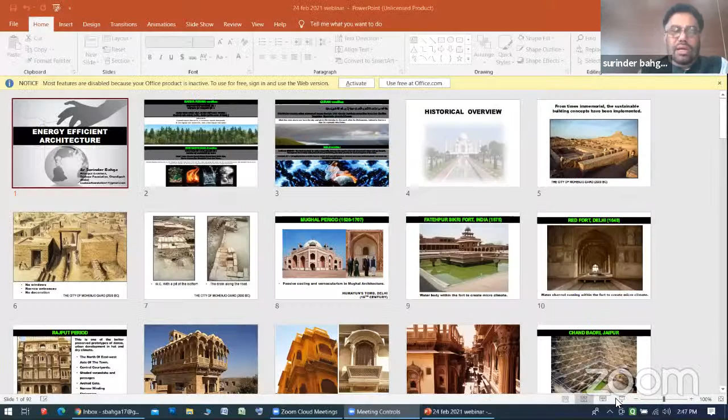Sir, in the meanwhile, you can tell us about the webinars that you've been hosting to promote energy efficiency in Punjab. Punjab Energy Development Agency is organizing a 7 days program, which is a week-long program to create awareness in all the departments of the state. And apart from that, there is a separate program going on with the architecture engineering colleges. And likewise, some debate in the state of Punjab for the school children. The aim is to create awareness about energy conservation.

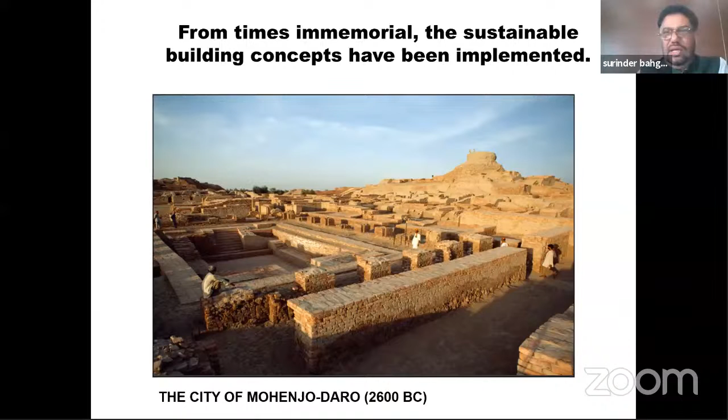So let's have a historic overview. In ancient India, the Mohenjo-daro township was built in 2600 BC, with care taken to design it keeping in view the geography and local climatic conditions, using local materials. There were no windows, they had brick jalis, and there was no decoration. The houses were very modern, using local bricks. That township had a proper designed sewerage system even in those times.

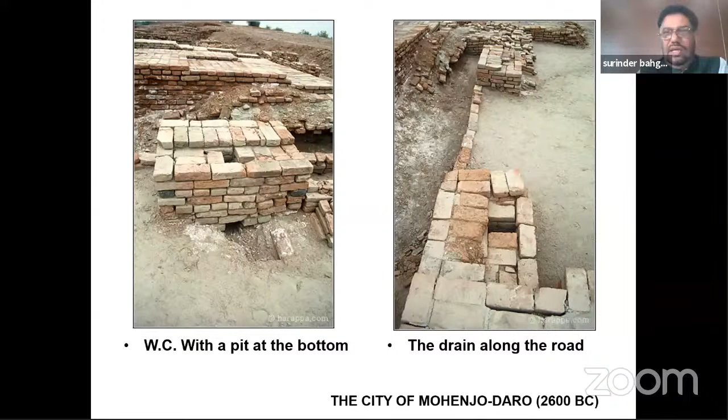In nearly 200 years of the Mughal era, India's architecture was almost at the peak of its perfection. All the buildings used local materials. There were projections in the Fatehpur Sikri fort built by Akbar. You can see the uses of water, stone, and jali.

This is the picture of Red Fort. There was no electricity at that time, yet there are water channels inside the verandas.

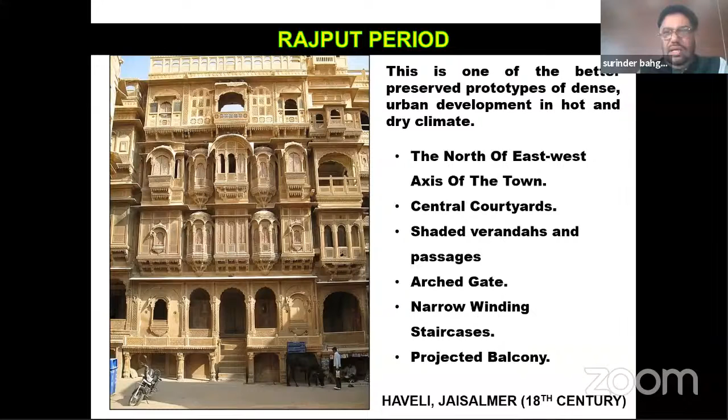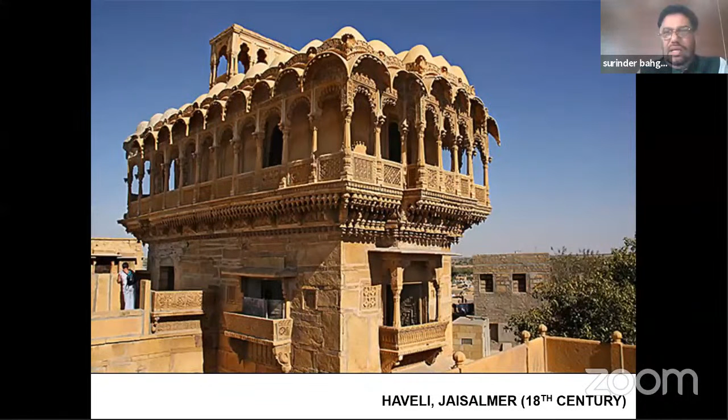In the desert of Rajasthan, in Jaisalmer, these havelis were created with local stone, and windows are protected from the dusty wind and hot climate. They introduced courtyards and used this kind of architecture to protect the interiors from harsh climate. You see how windows are protected, and the streets were very narrow so that they stayed shaded by the buildings themselves. These streets were there at Jaisalmer.

India has very advanced systems of water harvesting. This is a Chand Baori in Jaipur, and there are many others in other parts of India, where water conservation techniques were introduced.

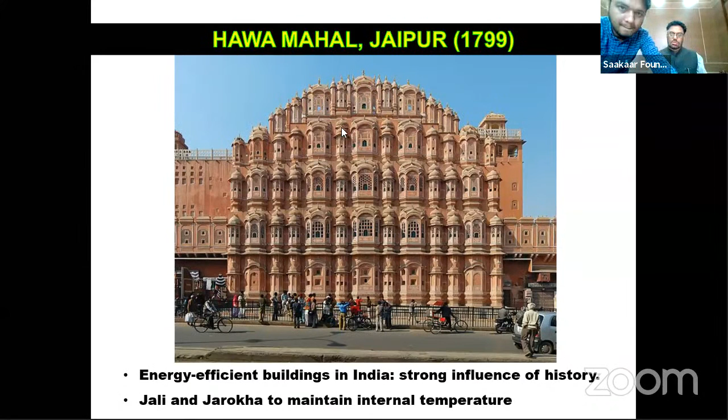Architect Bahga, can you hear me? I think his video, there has been some technical issue with his system. So yeah, he's back here online. Mr. Bahga, yes, can you hear me? me? Second. Yes, ma'am. Yes, please. Yes. Hello. Am I audible? Yes, sir, you are audible. Okay. So these kind of buildings were made in India way back. Neeraj? One second, please.

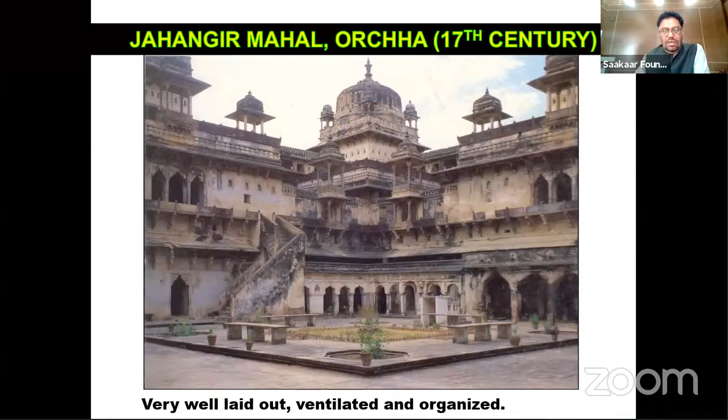In Orchha, Jahangir Mahal was made in the 17th century. You can see the courtyard planning, thick walls, and the shaded walls and openings. This was the kind of architecture India was needing.

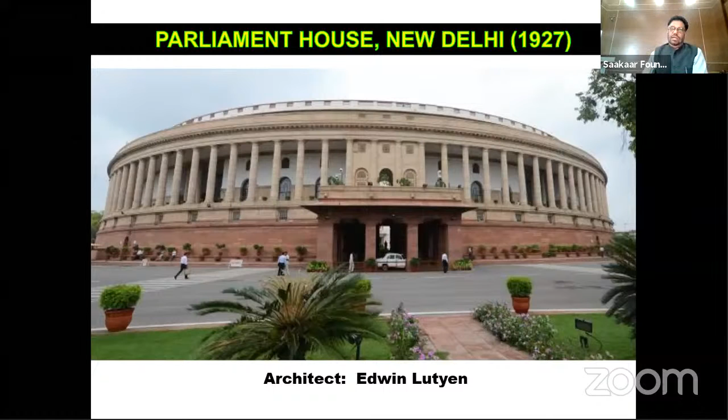During the British Raj, all the buildings built in Delhi were designed according to the local climate. Local materials were used, small windows were there, thick walls were there. You can see the Parliament House, and even in the Secretariat in New Delhi, projections and small openings are there. These projects were designed by British architects, but yet they still took care of the local climatic conditions.

This is the main point: when Corbusier came to India, Pandit Nehru invited him. On reaching Chandigarh, the first thing he did was study the climate of Chandigarh. Even the emblem of Chandigarh, the open hand, is designed to give the sense of wind direction to the local people.

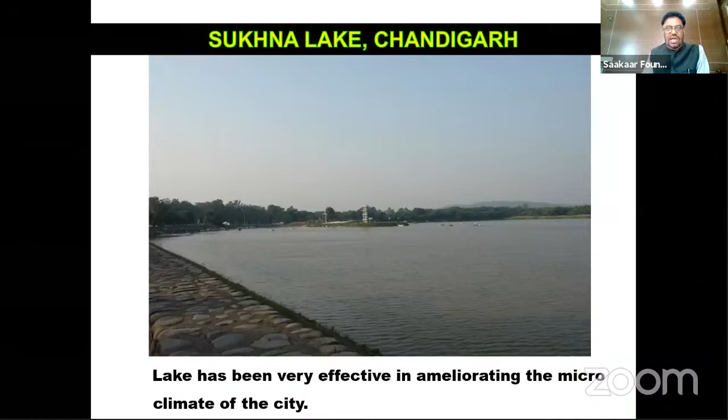Chandigarh has an artificial Sukhna Lake, which has considerably improved the microclimate of the city. That was designed by Corbusier with the same intent. Chandigarh is the only city where we have 35% green spaces, compared to cities like Kolkata where we have only 2% green areas.

In the High Court building, we have a double roof, and you can see how the glazing and windows are protected with a combination of horizontal and vertical louvers. In the Capitol Complex, this is the Assembly Hall with Vidhan Sabha. Corbusier introduced shallow water bodies so that users can get cool breezes.

In the Secretariat, care has been taken to orient the building in the wind direction, and the verandas and glazings are very deep, about 12 feet, so that they don't get heated up with the sun rays.

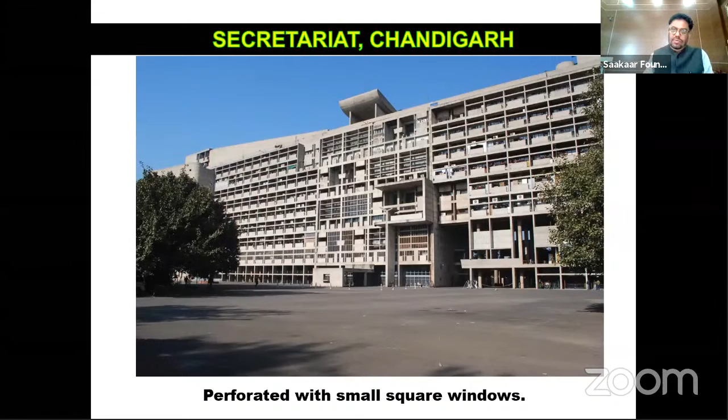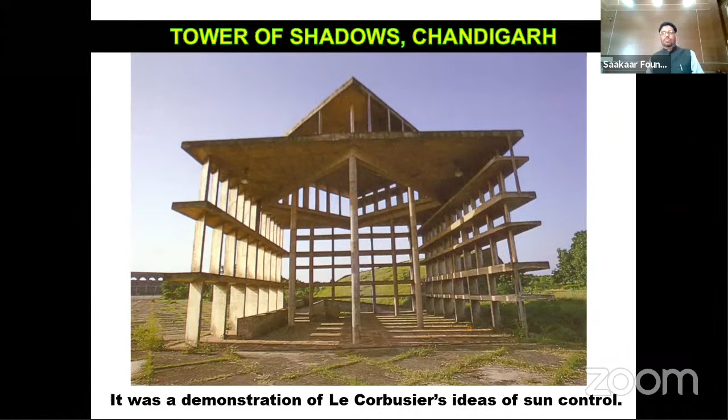This is the Tower of Shadows in the Capitol Complex, designed and implemented by Corbusier with the aim to educate architects and engineers about how to design louvers around buildings.

In the middle of the 90s, famous Indian architect Charles Correa built the LIC building in Delhi. In this building, for probably the first time, there was a huge glazing on the northern side. There was a lot of hue and cry that this architect had gone mad, designing buildings with a lot of glass in a hot and humid climate. But to my mind, that was very sensible, because we can always put glass on the northern side—it never gets heated up.

After that, this is our PEDA Bhavan, a very nicely designed building. But when the building was nearing completion, a senior bureaucrat of the Punjab government forced the architects to change the design at the last minute and put glazing all around, saying he wanted a Gurgaon-like building in Mohali. That was the major blunder he made, and the result is that this building never gets cooled, despite having tons of air conditioning load on it.

And the building works like a furnace. Buildings consume nearly 48% of the world's total energy - that's what surveys indicate. So when we design buildings, we have to have a very sensible approach.

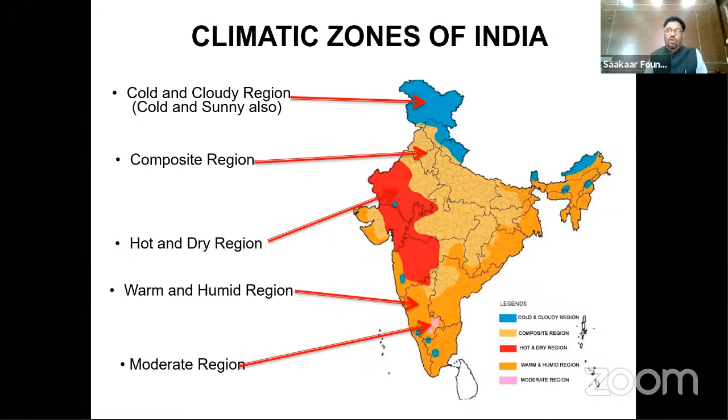Now I will briefly explain the design strategies for a composite region. We have to resist heat gain in summer and resist heat loss in winter, and we have to promote heat loss in summer and in monsoons.

Following these guidelines, we designed the Red Cross Bhavan in Sector 16, Chandigarh, facing the famous Rose Garden. The building is oriented to face north and south. The project got delayed by nearly a year because we argued with the Chandigarh administration that we should have a proper orientation, since the zoning plan was wrongly made nearly 50 years back. So we got the revised zoning plan sanctioned from the government with the help of the then chief architect, and ultimately the building was designed after a long struggle to achieve the right orientation.

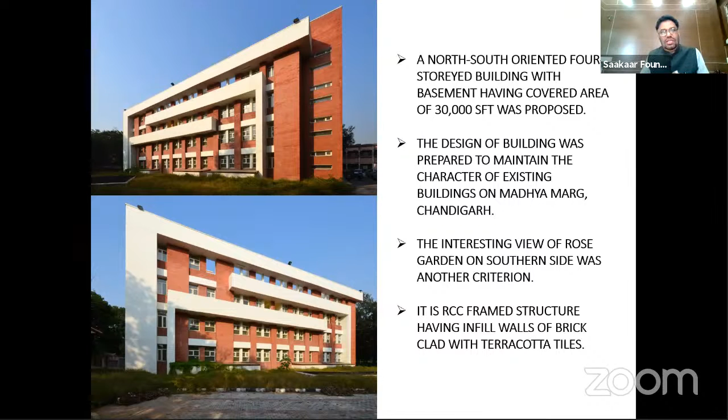In this project, you can see there are small windows, properly protected both horizontally and vertically.

Currently we are involved in designing a big university, the CT University on Firozpur Road near Ludhiana, Jagraon. This is a 50-acre project where all the buildings are oriented to face the north and southern direction. The major facade faces the northern or southern side, considered the best orientation for any academic building. We faced a lot of arguments with the client and owners to convince them to place the buildings this way. Very few people know that most buildings in the Punjab University campus are oriented in a similar way.

We participated in a competition for the HAREDA office building long back. In this project, we introduced shafts tapered at a particular angle, so there's no need for mechanical ventilation in the building. These shafts are scientifically designed so that hot air sucked from inside can rise and escape through the top openings.

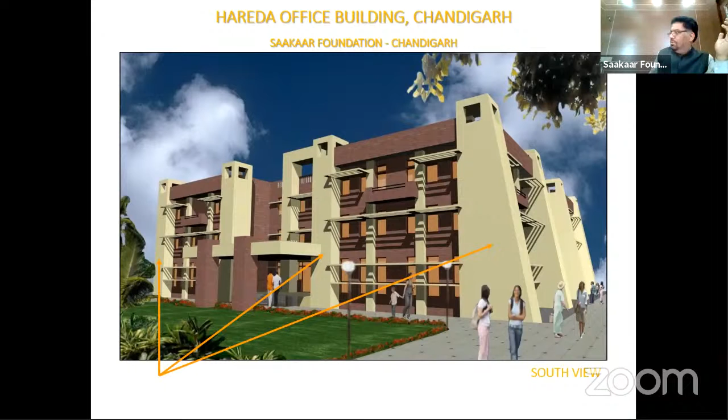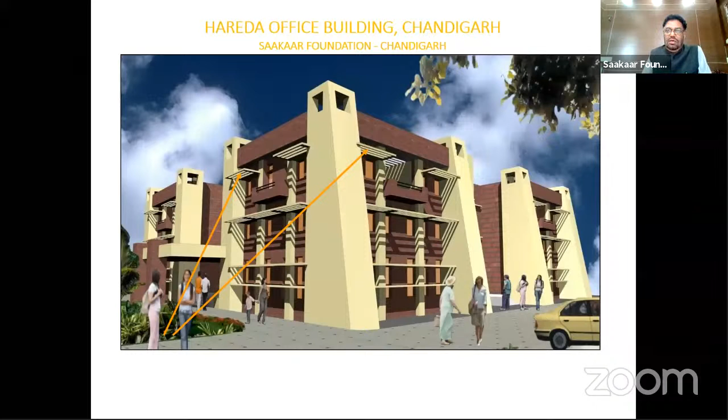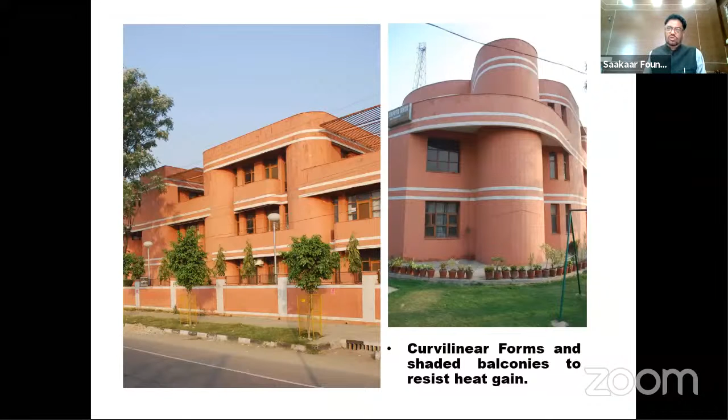Next is the Bal Bhavan, which we designed in Mohali. Here on the western side - which gets very heated up in our climate - we put all the toilet blocks on the front, which people normally don't advise. We decided that if the toilet blocks get heated up, at least the heat won't transmit to the dormitories where children stay. You can see how we shielded the windows with balconies and projections, and the building also has open-to-sky terraces where children can enjoy the weather.

Then we designed this primary school wing of the Yadvindra Public School. This was a design competition which we won. Captain Amrinder Singh, the current Chief Minister's mother, Maharani Mohinder Kaur Ji, was the chairman of the trust, and she directed that no tree should be cut from her school - she would give the project to the architect who would not cut any tree. Many architects submitted design proposals, and she chose our design with the help of experts and other jury members.

As a result, when we designed this building, we did not cut any tree, and we have shielded the windows properly.

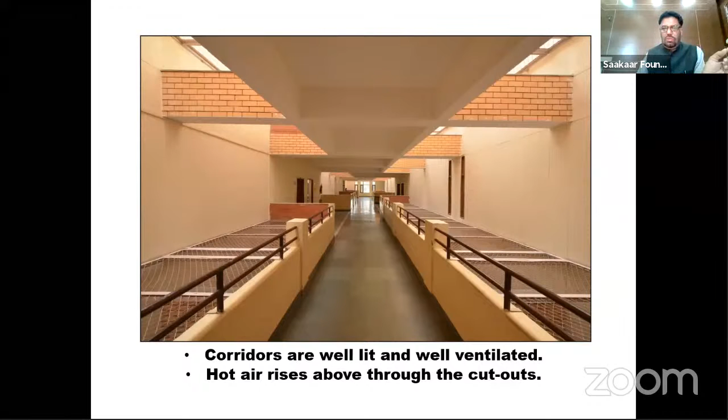This is the corridor of the primary school, and there are cutouts on either side. These cutouts facilitate internal air movement and bring in a lot of light, so the interior becomes very nice, and the noise in the corridor is not allowed to enter the classrooms. Classrooms get a better quality of education because there's no noise at all due to these cutouts.

We also designed a youth hostel at Patiala long back. Here too the windows, doors, and glazing are shielded properly. These balconies are segregated from each other to ensure privacy to all the residents.

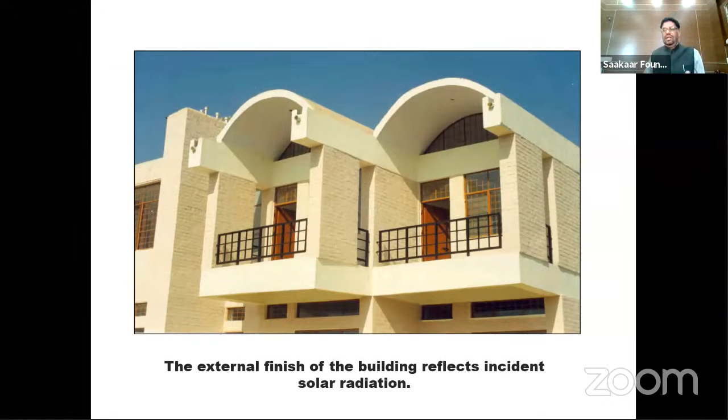And to drain the rainwater, we have provided rainwater spouts.

We also designed a Christian school, Baptist school, in Chandigarh. Again you can see the windows are properly protected with a combination of horizontal and vertical louvers. You can see this model — we have planned courtyards, two smaller and two bigger, in the plan. This is a very traditional kind of planning, but we opted for this because it works better in Indian climate.

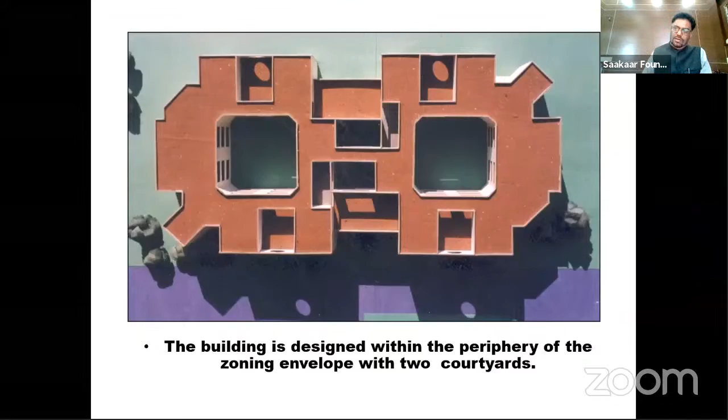Then we designed about 1,200 rooms for the postgraduate students of NIT Kurukshetra. Here we designed an individual small room for each postgraduate student with an attached balcony, and all the rooms have independent balconies and glazing which is properly protected. There are also courtyards and other features to keep the building cooler.

We then designed this convention center in New Delhi for the Ministry of Agriculture, and we won first prize for this 40 crore project.

We also won a prize from HUDCO for designing energy efficient housing in Jalandhar. In this project, as you can see in this sketch, we have provided earth berms at the bottom.

We have provided planters in front of the windows, and perforations in the parapets. There's a staircase tower in the middle which has openings at the top, and those openings help suck hot air from the surrounding rooms, which can escape through this stairwell. Ultimately, the building remains cooler.

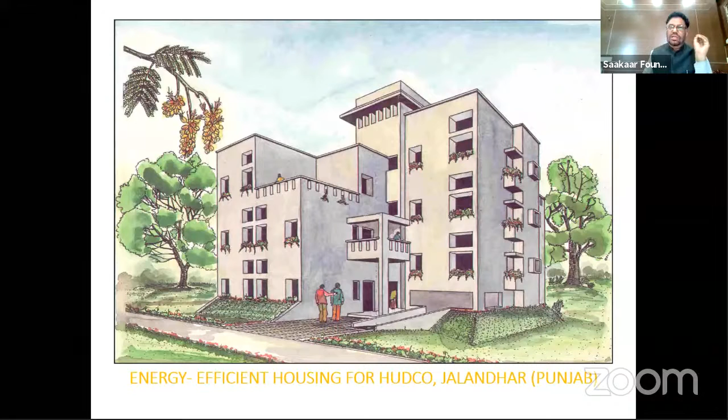We also designed a very small library in a small village in the Moga district, called Lopon. This is called a green library in the village. There's a cooling tower on top which cools the air, and the cooled air is thrown down into the interiors of the library, so the library gets cooled air.

The building has north and south orientation, and on the eastern and western sides we have cavity walls because we get a lot of heat from those sides.

Even the book racks are placed along the external walls, with windows kept above them. In this picture, the windows are above the height of the book racks, and these small windows are deeply recessed so that no rain or sun rays can fall on them. As a result, this building remains very cool, and the whole village uses it, along with neighboring villages.

The next climate category is hot and dry, primarily Rajasthan. Here the design mantra is different: we have to resist heat gain and promote heat loss at night.

We designed a township for the Indian military — a married accommodation project with more than 800 houses. It was very difficult to convince the army authorities to design this whole township to suit the local climatic conditions.

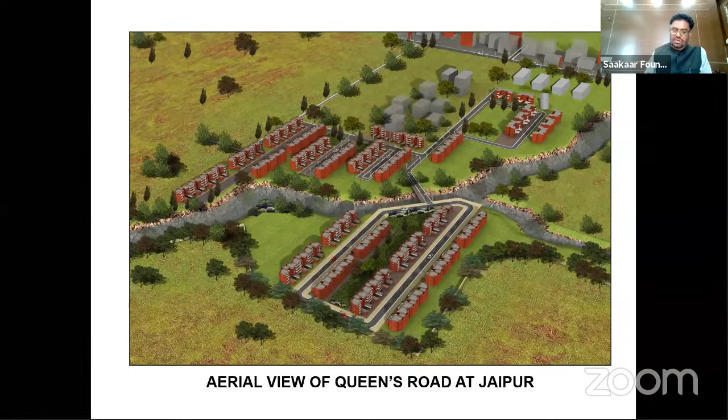We opted to orient all the blocks facing north and south, because in a hot and dry atmosphere only this kind of orientation works. Ultimately we could convince the authorities to have this orientation, though they had wanted just the opposite.

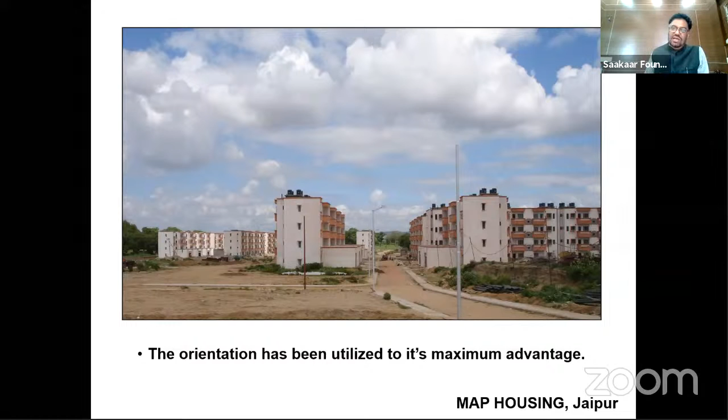This is the township, the housing we made for military officers and jawans. We used light color to reflect the sun's rays, and all the balconies and windows are shaded with a self-shading facade design. We also opted not to cut any tree on the site, and the planning of the whole township was done in such a manner.

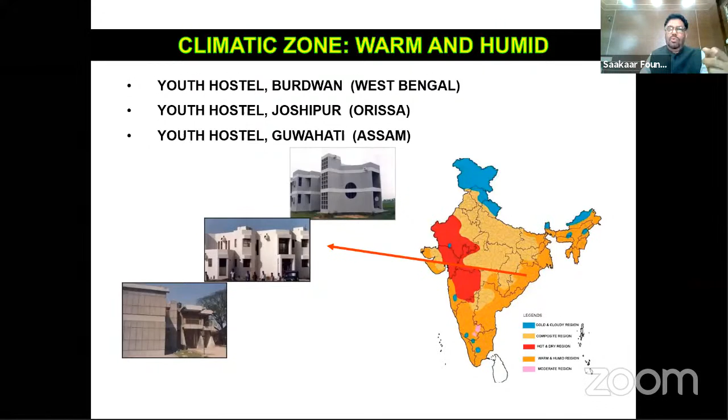Warm and humid climate is the coastal belt of India, where the design strategy is to promote ventilation.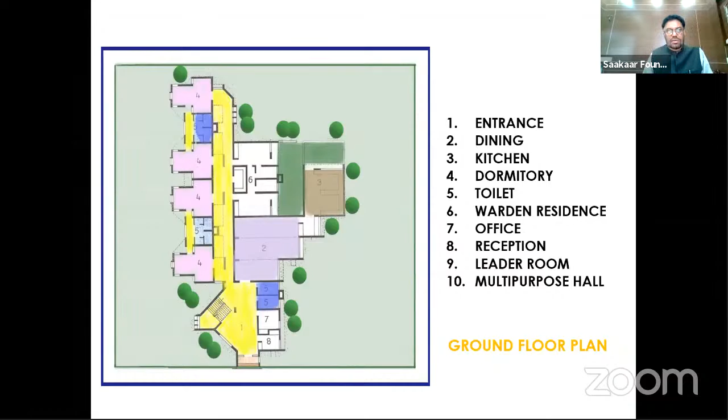When there's no electricity, the climate is very humid. We just open all 6 windows, and this becomes livable. At least the students or youngsters who stay there can live there. So this is the kind of building we conceptualized for West Bengal.

Because of a lot of rainfall and humid conditions, even the color scheme of the building was chosen so that it doesn't get blackened easily. To drain the rainwater from the roof terraces, rainwater spouts were introduced. And look at the window boxes, how we protected the windows from the rain and the sun.

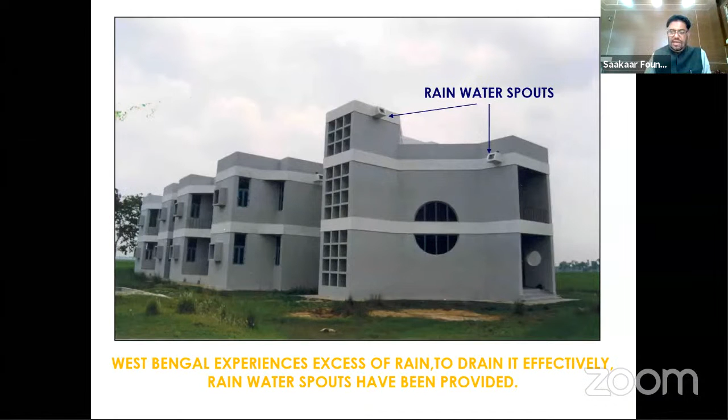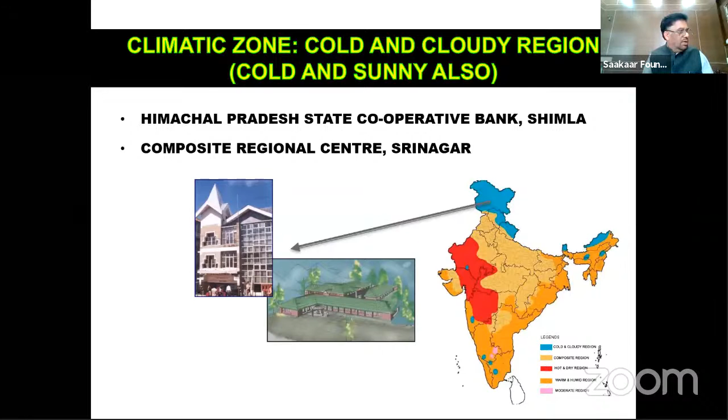The next category is a cold and cloudy region, which is Kashmir. We happen to design one project meant for people who got injured or incapacitated during insurgency. When we design buildings in such a climate, we have to take care to resist heat loss and promote heat gain.

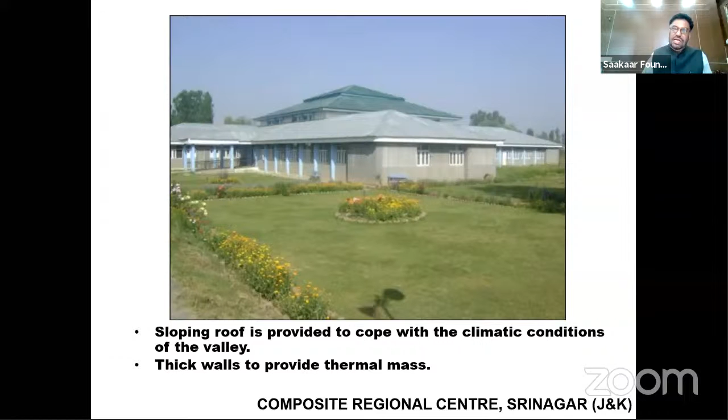Designing buildings in a cold climate is altogether a different game plan than designing buildings in Rajasthan. This is the project we designed in Kashmir. Here, snowfall is a serious problem. Snow, when it falls on the roof, gets accumulated, and it is very difficult to clean mechanically or physically. So we tapered the roof at a particular angle, and the snow automatically falls on the ground, saving the hassle of snow clearance from the roof.

The plan shape is swastika shaped, which is a sacred Hindu symbol. In the last part, I would like to show you a small video on how waste materials can be utilized for making houses. This is an example taken from Nigeria.

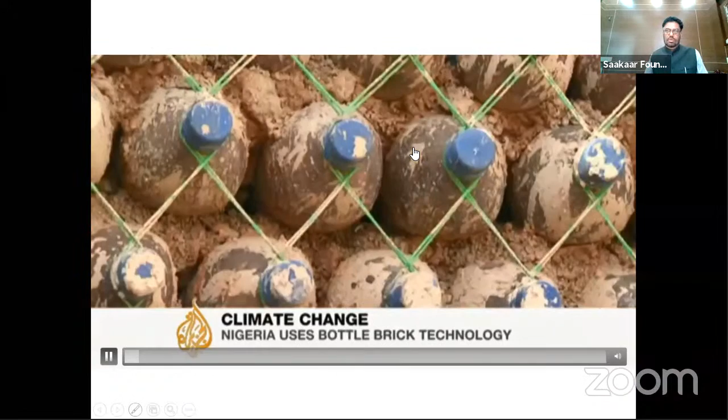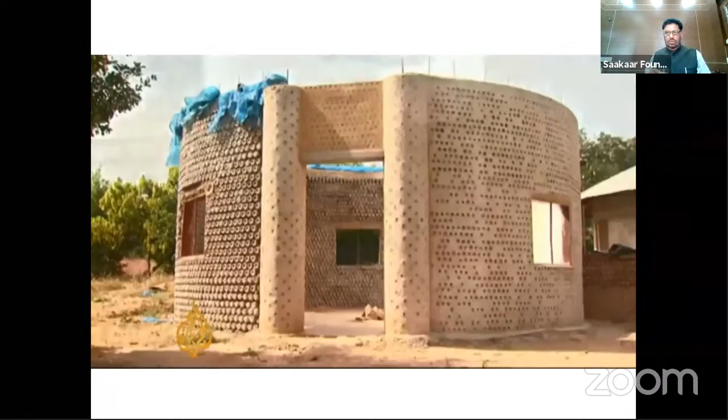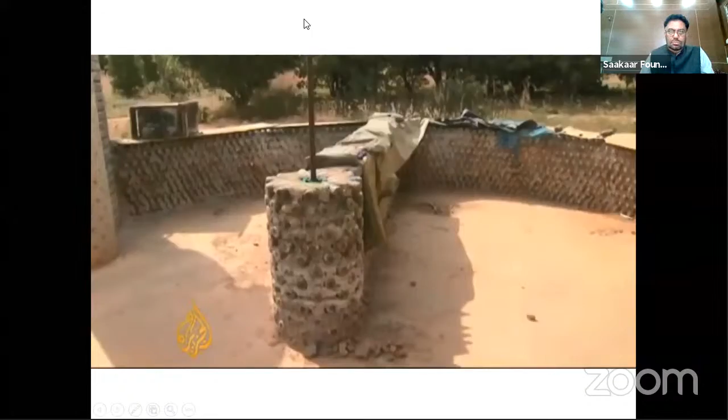They have lived in houses made of mud for centuries, but the cost of traditional house building is getting higher by the day. A house made of plastic bottles costs $15,000, one third of the usual price, making it more attractive. As there's no shortage of raw material, which is basically free, there's no reason why anyone should resist. The developers are looking for government support to expand the idea, hoping that cleaning up the streets and creating a much-needed greener economy will be a good impetus for government involvement. Reporting from Kaduna State, Nigeria.

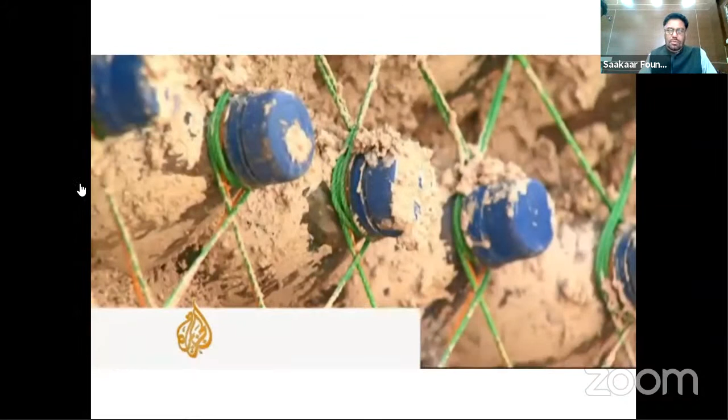It's an ingenious way of... Sir, we cannot hear you. Hello, now you are audible. Sir, again your audio is not audible.

This video was showcasing how waste Coca-Cola bottles can be utilized to make houses for poor people, and Nigeria is already doing it. The bottle is filled up with sand, and the bottles are piled up one above the other, tied with a nylon rope.

The conclusion of my whole talk is that India is a big country, a huge country, and there is a need to design buildings keeping in view the local topography and local climatic conditions. We architects and engineers have to see which zone we are falling in, and accordingly design the buildings. Thank you so much.

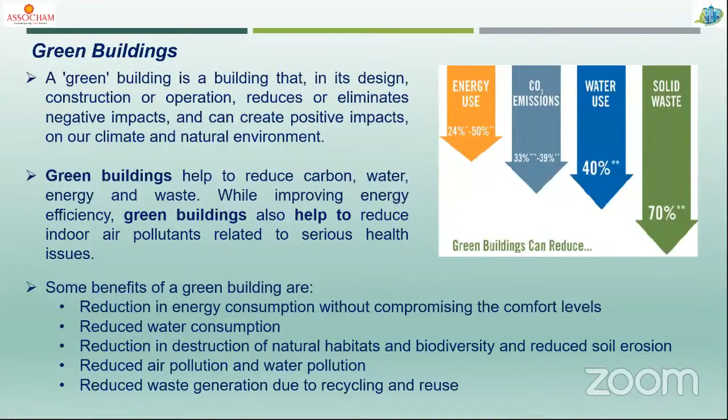So friends, these are some basic concepts. We have been hearing since the last 15-20 years that green buildings are very efficient buildings when properly designed. We can save around up to 50% of energy use, up to 39% of carbon dioxide emission, up to 40% of water use reduction, and up to 70% of solid waste reduction. So these are some benefits of green building design. There are many environmental benefits, economical benefits, and social benefits of designing green buildings.

So green buildings are inherently designed to make the best use of natural resources, and a green building is much more friendly to the environment than a normal building. We all know it has economical benefits also. So friends, there is a myth that designing or constructing a green building is a costly affair.

No, I can prove it on paper. I have done around 300 plus green building certification projects now, and I can prove that going for a green building certification is not a costly affair. In fact, from the very beginning, right from the first day, you will start saving your money. And I can prove it on papers, on energy models, daylight models, or any way you want it. Social benefits, we all know, friends, during COVID and post-COVID, now everybody understands the value of a home, a value of an office which has good daylight, good fresh air.

Even earlier the demand was good, but after this COVID thing, now offices, factories, warehouses, and many residential buildings are going for green building certification because they understand the requirement of a space which has proper daylight and proper fresh air. We all know that green buildings are very good for the health of the entire ecosystem that occupies it, and they also decrease the load on the local infrastructure.

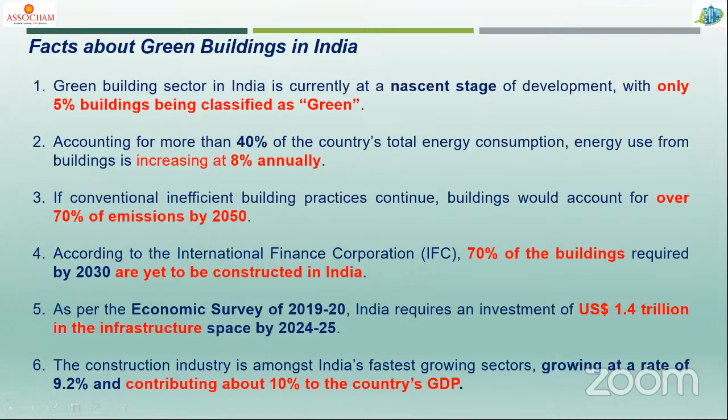Friends, government has started many residential construction programs like Housing for All. So this green building certification can not only save our environment, it can give jobs to many professionals, because government is focusing too much on providing housing for all, where our architects, engineers, and professionals can be associated to help design these affordable houses even more sustainable and green.

So post-COVID, green buildings can become a strong driver of economic growth and help build back better by providing 9 million skilled jobs in both the renewable and construction sector by 2030. So it is not only protecting our environment and saving our mother earth, it is giving the opportunity of jobs to our skilled manpower also.

So government in collaboration with the banking sector can together provide fuel to the green construction sector. And if India embraces the concept of green building to meet huge demand, it would be a win-win situation, not only for the environment, but the economy also. So we see green building from that perspective, because we are an industrial body, and our aim is not only to protect the environment, but to protect the industry also.

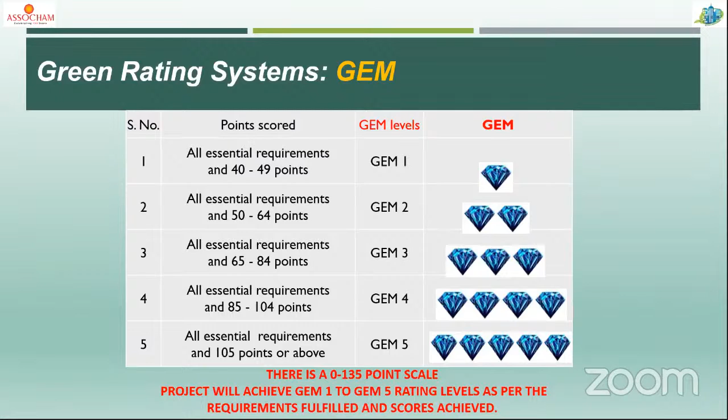And friends, why GEM? GEM is the first and only green building certification of the country, which is the indigenous program, based on the latest guidelines of Bureau of Energy Efficiency, ECBC 2017 and NBC 16. No other program has been designed on ECBC 17 and NBC 16.

The program includes sustainability, energy and water efficiency, fire and life safety, more greener area, indoor air quality, daylight, fresh air, human comfort, and is based upon the latest version of ECBC. This is the only program which has fire and life safety also in the program. No other green building certification program has fire and life safety in the curriculum.

It is an affordable certification program. The fee is up to 30% less than other programs. This is the first indigenous program, as I discussed, which is based upon ECBC 17 and NBC 16 and has fire and life safety also.

This is a great recognition for the buildings by India's century-old apex industry chambers for the buildings, and cost is between 6 to 10 rupees per square feet as compared to conventional building, which is nothing. And payback period is only 3 to 4 years.

And friends, in GEM, we have a live monitoring station also. This is the first program which has this facility that we can monitor, we can review the buildings online also. It's a 24/7 facility provided to the GEM compliant buildings, that all GEM compliant buildings and other buildings can be monitored 24/7, and we monitor electricity consumption, water consumption, air quality, and fire and life safety also. This monitoring station is available online.

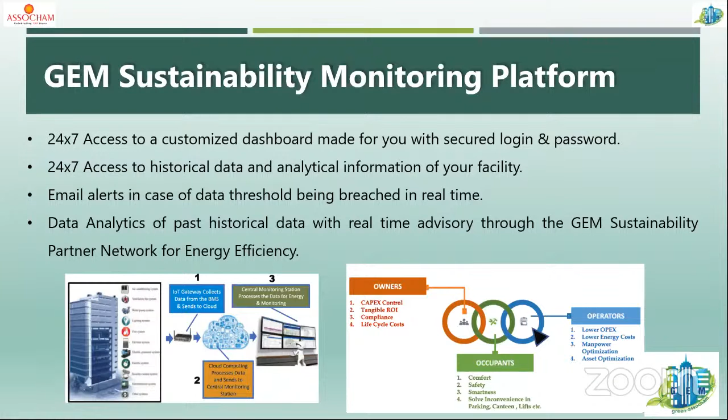And we are really proud to have MOUs with the CSIR-NEERI, Indian Institute of Architects, NAREDCO, FSCI, ISLE, GSCS, ISHRAE, Smart Habitat Foundation, Air Quality Association, and ASHRAE.

This GEM Green Building Certification Program has been empaneled with the Rajasthan government, with Rajasthan Building Bylaws 2020 for free extra FAR incentives for green buildings. This is a major achievement, what we have done in last 2 years. We are in the process of empaneling this program in other states also, in Punjab, Uttar Pradesh, and other states also. The program has been listed by CRISIL also, along with other programs.

You can see over the slide. This is the certificate and plaque we provide to the GEM compliant buildings.

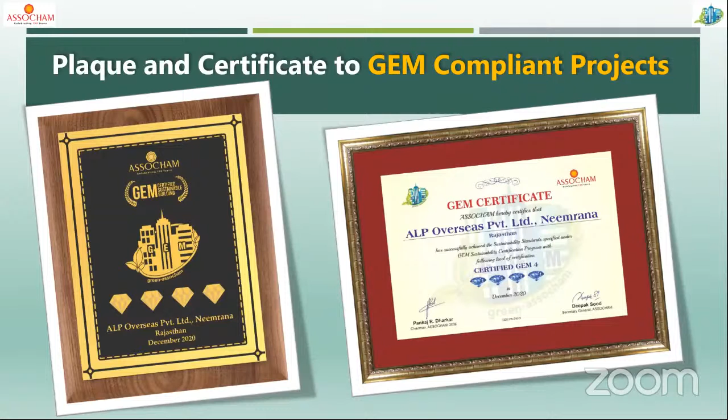We have various commercial buildings, residential buildings, hotels, hospitals, and even various government buildings also. Many airports, many commercial buildings we have done in last 2.5 years only.

And friends, this GEM Green Building Certification Program requests you to save trees and save earth. So we request to provide more and more landscape area over the Mother Earth and preserve and plant trees on site. We suggest to plant native and adaptive drought tolerant flora on site.

On the other hand, GEM Green Building Certification Program requests you to save water. Green buildings can reduce the water usage by 30 to 40%.

So we request you to design the rainwater harvesting system or storage system in the project, wastewater treatment system to treat wastewater from toilets and kitchen, then provide dual plumbing in the toilets, use rainwater and treated water for flushing, HVAC and landscape applications, install low flow water fixtures, and best irrigation practices for the landscape.

If you do this, you will be able to achieve at least 40 to 45% reduction in potable water consumption of the building, and we can prove it. Otherwise, if you do not follow this, we will never know the worth of water till the well is dry. It's like that.

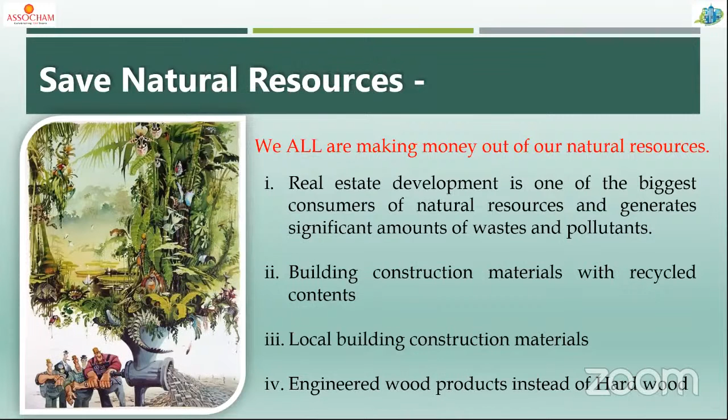We have discussed saving trees, our natural resources, and water. Here we also request you to save energy. A green building, if properly designed, can reduce energy consumption by 20 to 30%. We need to install energy efficient air conditioning and electrical equipment, use LED lighting, occupancy and daylight sensors, design buildings to utilize natural light instead of artificial lighting, adequately size windows to utilize fresh air, optimize facade glass selection for daylight and heat transfer, and install renewable energy resources such as solar PV, wind turbine, and biogas.

As suggested by Surinder Bagaji, he has used many such features in his projects and buildings. We can see how efficient buildings have been designed by Sakar Foundation Bagaji, and he has utilized many such features, not just now, but for the last 10, 20, 30 years.

Friends, if you are designing a building, you are not designing it for 1 or 2 years. You are designing a structure which is going to last 70, 80 years. If you design an improper building, you will be harming the environment for the next 70, 80 years. But if you design a good, energy efficient, water efficient, sustainable building, you will be saving our Mother Earth for the next 60, 70, 80 years.

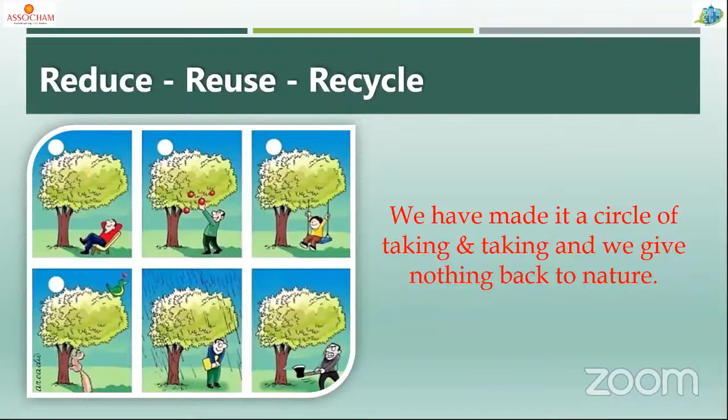Friends, we would request you to stop the glamorous portrayal of the business world with the ugly truth. We celebrate Water Day, Environment Day, Engineers Day, Architects Day, Doctors Day, and so on, but we are hiding away the truth, which has always been the instant, short-term solution for mankind. The long-term solution is that we all together have to design sustainable buildings, sustainable built environment, and follow energy efficiency and water efficiency.

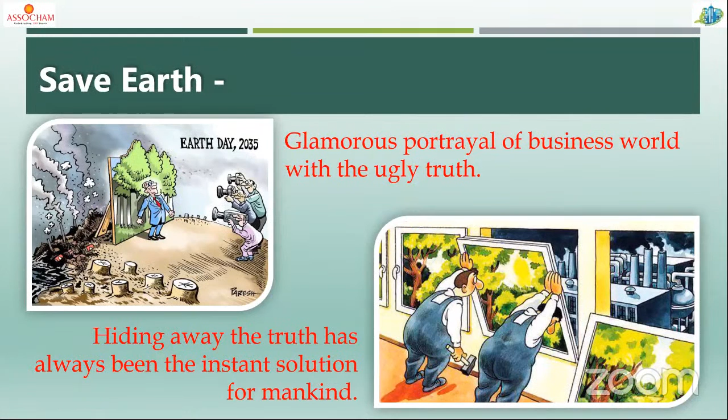Otherwise, what will happen? This nature will become a historical topic in the near future. Friends, I would request you to stop fooling yourselves and do justice to the environment and to Mother Earth, and start designing green buildings. Otherwise, to our next generation, we will only be able to show all this in pictures.

Under GEM, we also conduct the GEM Certified Professional Training and Examination. In the last 1.5 years, we have trained and certified around 800 plus architects and engineers, making them GEM Certified Professionals, now authorized to execute the GEM Green Building Certification Program themselves. On this forum, I would request you all to join us and go for GEM certification, and also the certified professional online examination. This is an online, open book examination that you can take anytime from anywhere.

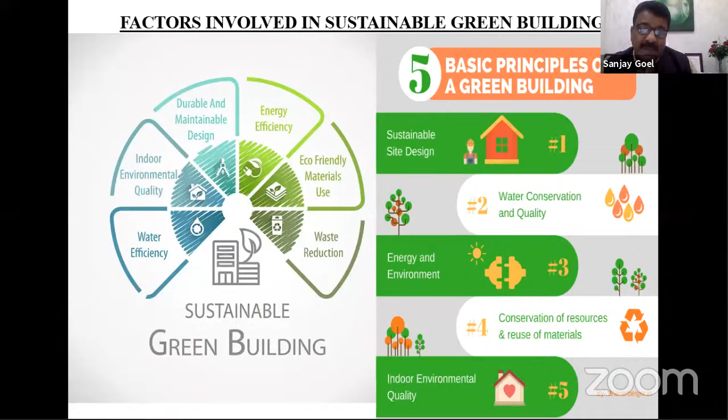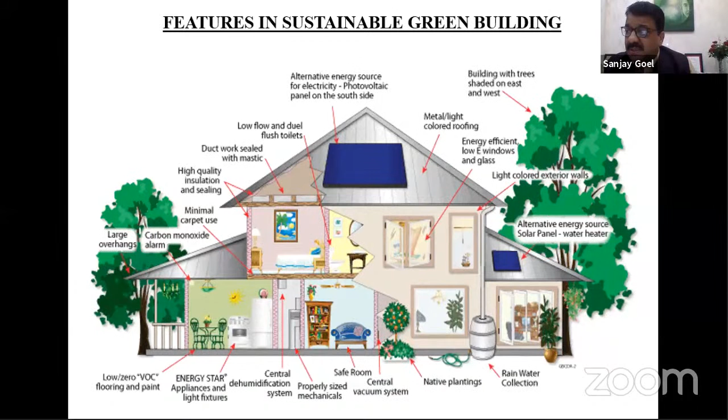Now, the introduction to energy efficient building materials. An eco-friendly building material is one that increases the efficiency of energy used and reduces impact on human well-being and the environment. Examples are glass, bamboo, fly ash bricks, AAC blocks, eco-friendly insulation materials, etc. The building industry is one of the largest sectors which consume natural resources, manpower, energy, and economy. The growing demand for materials in the building industry cannot be fully met by natural resources or energy efficient traditional materials. Hence, there is a need to utilize available alternatives and innovative techniques to solve the increasing needs in construction.

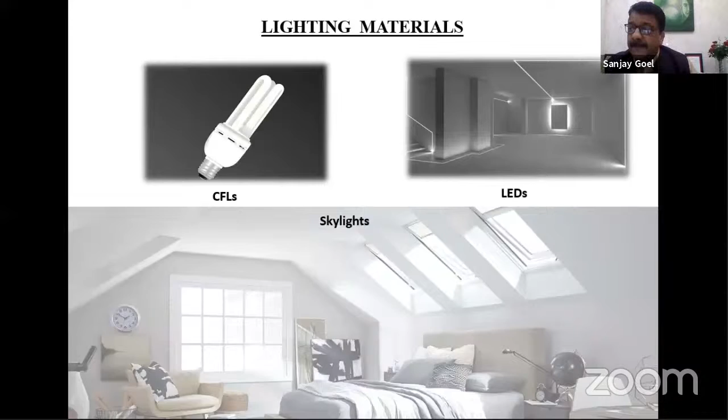So regarding lighting materials, we know how during the past decades we have moved from one technology to another - earlier it was CFLs and now LEDs, along with the use of skylights in buildings. CFLs, compact fluorescent bulbs, are a profitable investment, saving several times their purchase price through reduced electricity bills and fewer replacement bulbs because they last 8 times longer. LEDs have long life, are energy efficient, ecological friendly, durable, have zero UV emissions, design flexibility, and are environmentally friendly.

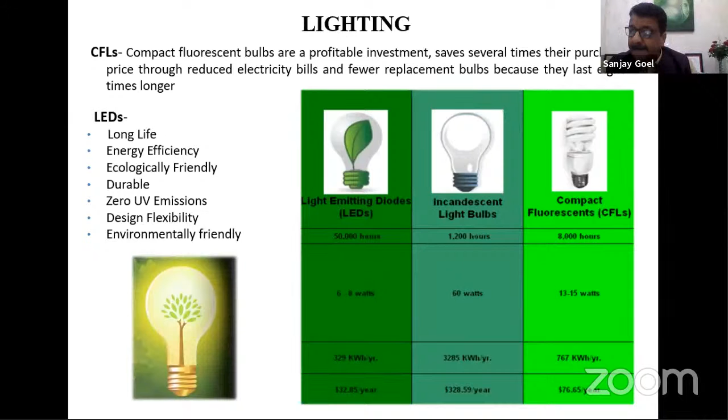Skylights, we can see the ever increasing use of skylights in buildings, especially buildings with central courtyards and atriums, where architects are preferring to use skylights as the buildings are air conditioned. Skylights are very useful from many points: they allow light into the building, heat can be avoided, and buildings remain cool as per conditions.

Polycarbonate sheet, general purpose glazing grade, offers superior durability, unmatched design flexibility, and structural integrity that easily surpasses laminated glass and acrylic alternatives. Polycarbonate sheet will transmit 80 to 86% of light. This product is UV stabilized.

Technologies: solar panels, cool roofing.

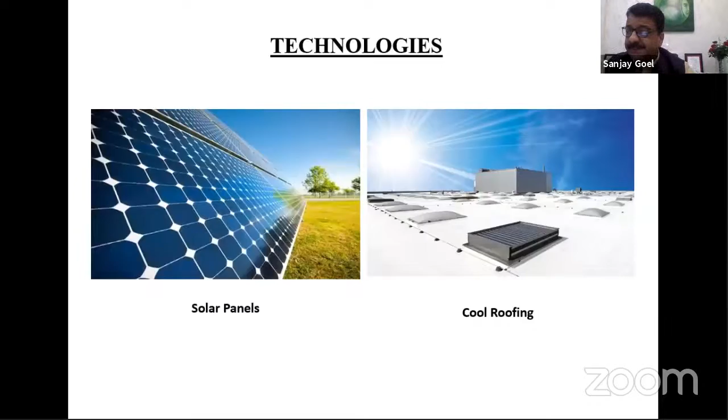Solar panels. Solar power is a renewable resource available everywhere in the world. It's good news that during the past decade especially, the use of solar panels has increased many folds. We can see it not only in cities or commercial buildings, but even in villages or small towns, even for residential buildings, people are preferring solar energy, not only for water heating but even for electricity. So we can see a number of buildings, even small residential buildings, with solar panels on top.

Solar PV technologies are small and highly modular and can be used virtually anywhere. Unlike conventional power plants using coal, nuclear, oil and gas, solar PV has no fuel costs and relatively low operational and maintenance costs. PV can therefore offer a price hedge against volatile fossil fuel prices.

So either we have to go ahead for the warm roof or warm walls, or cool roof or cool walls, depending upon the zone. As architects, we are designing buildings in the cool areas of J&K, Himachal, as well as in the hot areas of Rajasthan or NCR, Punjab, Haryana, where 80% of the time the temperature is hot in the hot climate zones, and in the cool areas 80% or 70% of the months are cooler.

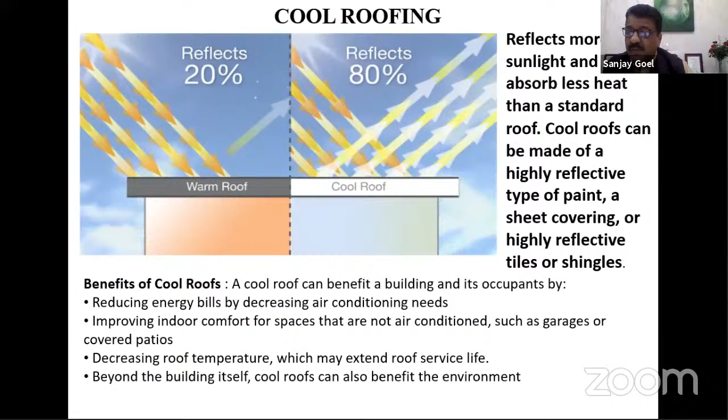Benefit of cool roofs: a cool roof can benefit a building and its occupants by reducing energy bills, by decreasing air conditioning needs. We have seen many buildings where, with specialized consultation, the load of air conditioning has been reduced by 20 to 30% very easily, improving indoor comfort for spaces that are not air conditioned, such as garages or covered patios, and decreasing roof temperature, which may extend roof service life. Beyond the building itself, a cool roof can also benefit the environment.

Green interior techniques reduce water use with the help of fixtures. Recycled content: steel studs for interior framing. Steel contains up to 95% recycled content. Flooring: certified wood finishes, low VOC paints.

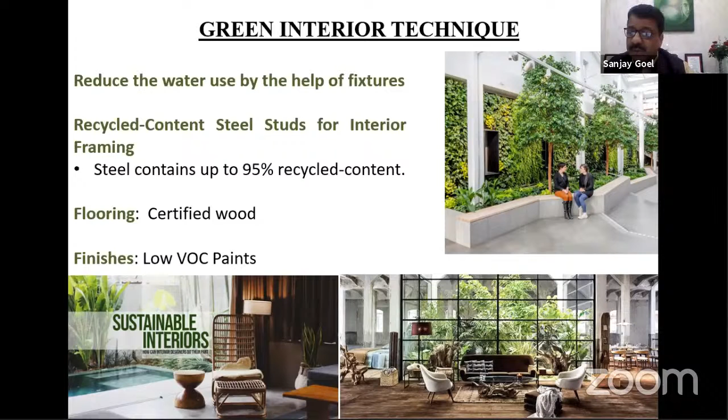You can see the Bullitt Center Living Building, opened on Earth Day of 2013 as the world's greenest commercial building.

Now, more natural materials we are using since decades: bamboo, shingles, mud bricks, fly ash bricks, and paved tiles.

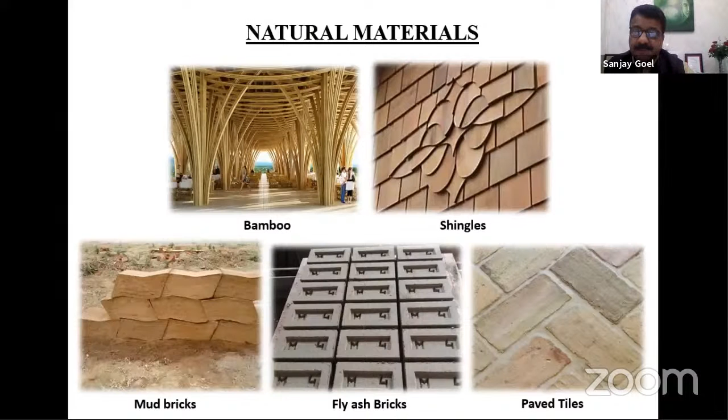Bamboo, we all know, is a very old and famous environment friendly material. Since our childhood we are seeing the use of bamboo in various activities. Bamboo has been in wide usage since ancient times as a low-cost material for houses, bridges, etc. It recently started appearing in designer homes as flooring, walling, and paneling material, even for scaffolding, reinforcement, roofing, walling, doors, and windows.

Paved tiles. You can see normal paver tiles and grass paver tiles. Grass paver tiles allow water to drain through their hollow centers, while normal paver tiles decrease water quality and increase storm water runoff.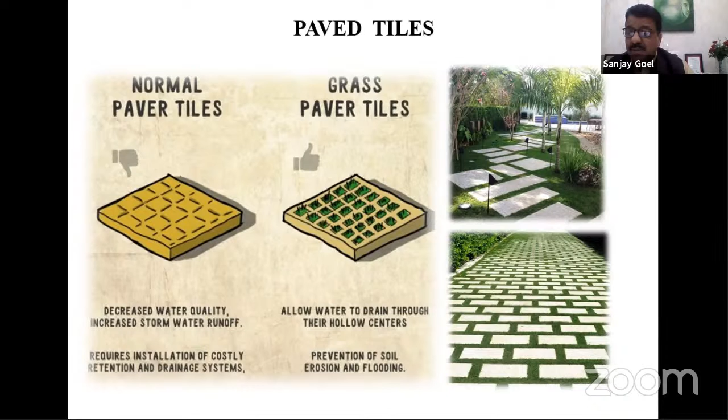Fly ash bricks. Adding fly ash to concrete reduces the energy needed in processing Portland cement. It requires less water, is somewhat easier to use in cold weather, and is less likely to crack. One reported drawback of fly ash concrete is that it takes longer to set up to full strength.

Shingles. Roof shingles are a roof covering consisting of individual overlapping elements. We are using shingles in 10 to 20% of houses where a client prefers sloping roofs, even in non-hilly areas. These elements are typically flat, rectangular shapes laid in courses from the bottom edge of the roof up, with each successive course overlapping the joints below.

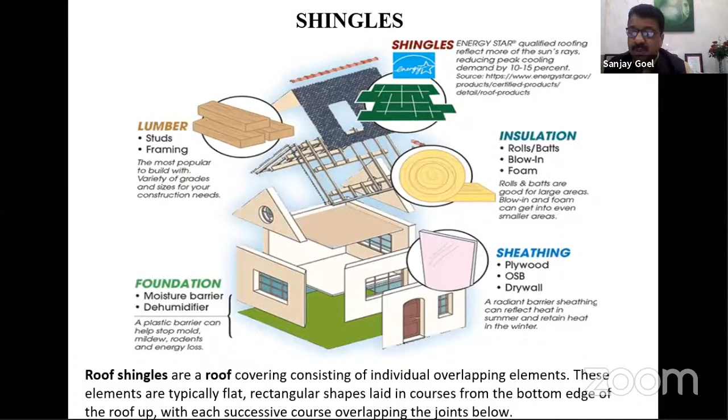Mud bricks. One of the most ancient construction materials known to man is mud brick, also referred to by the Spanish name adobe, which means mud or puddle earth, generally referring to the technique of building with sun-dried mud blocks in either load-bearing or non-load-bearing construction. Adobe, cob, compressed earth block, etc. can reduce our demand for brick, stone, concrete, cement, steel, and wood. With natural heating, cooling, and ventilation, such structures can substantially lessen our consumption of energy and resources and eliminate pollution.

I think more and more architects, especially young architects, should focus more on environment-friendly green building materials. Otherwise, we have seen in the majority of cases during the past many years, architects, especially the younger generation, preferring modern building materials that are not environment friendly. I think it is the right time to focus on environment friendly green building materials in our constructions and at the design stage.

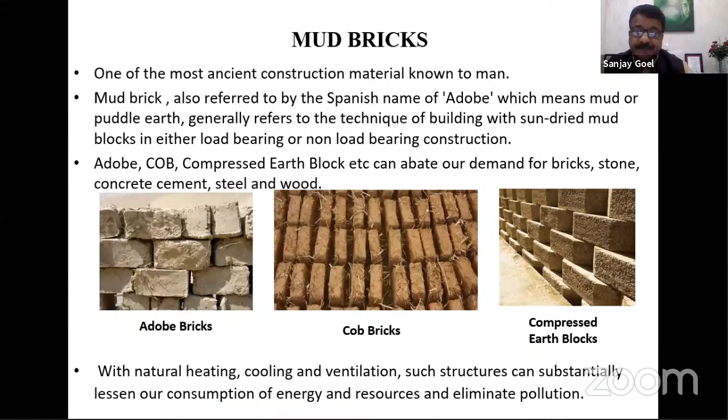Insulation materials include vacuum insulation panels, fiber insulation, and structural insulated panels. A vacuum insulation panel is a form of thermal insulation consisting of a gas-tight enclosure surrounding a rigid core from which the air has been evacuated. You can see the photograph showing the cross section.

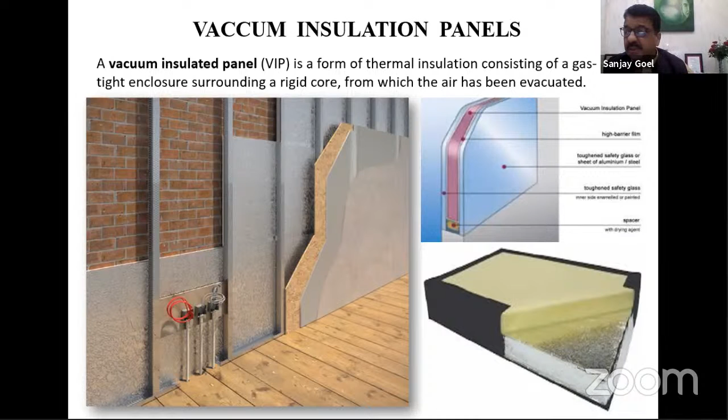Structural insulated panels use a foam board or liquid foam insulation core. Application is on unfinished walls, ceilings, floors, and roofs.

For mineral wool, application is ducts in unconditioned spaces and other places requiring insulation that can withstand high temperatures, for noise control as well. HVAC contractors fabricate the insulation into ducts either at their shops or at the job sites.

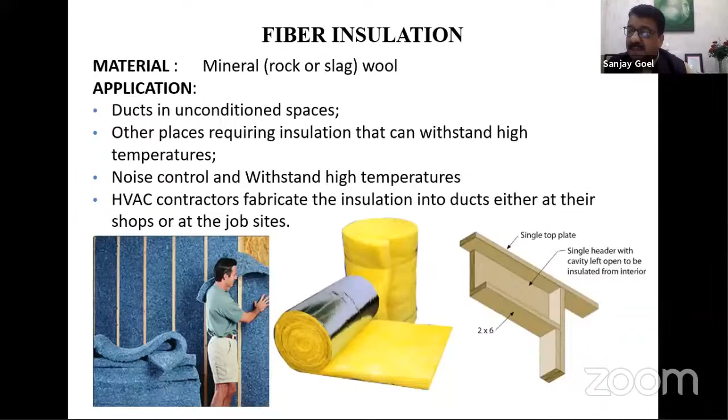Now, energy efficient glass. Double glass - the use of double glass is increasing in the building. Reflective glass as well. So, solar control low emission glass.

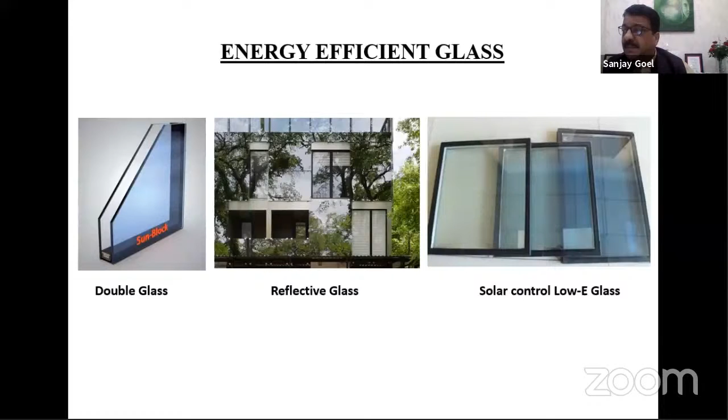For double glass, you can see in the diagram cross section how one glass pane and a second pane have gas filling and air in between. There are many advantages, not only environmental advantages, but noise etc. also get reduced.

Reflective glass: a metallic coating is applied to one side of the glass, which significantly increases the amount of reflection by the glass of both the visible and infrared range of the electromagnetic spectrum. This metallic coating can be applied to clear or body tinted glass.

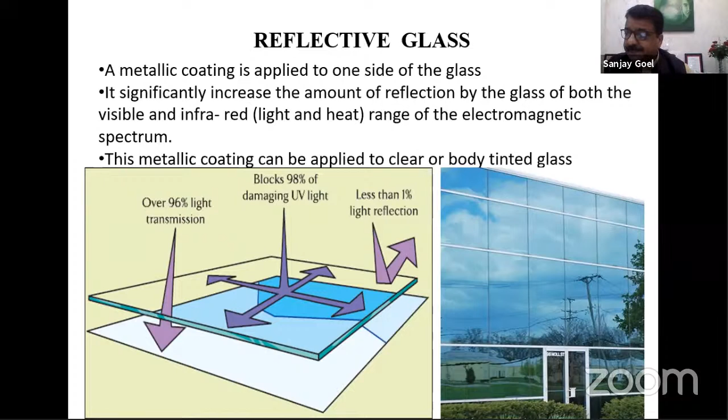Solar control low emission glass. Glass will do three things with each part of the solar energy spectrum: reflect, absorb, and transmit. Solar control low emission glasses are designed to transmit high amounts of visible light and reflect IR. Passive solar low emission glasses are designed to transmit high levels of both IR and visible light. Reflective coated glasses generally reflect the most visible light.

See this working in the given cross section. Low E glass has a special coating which is a poor radiator of heat and does not allow heat to be transferred to the outside. Instead, the low E coating actually reflects the heat back into your room.

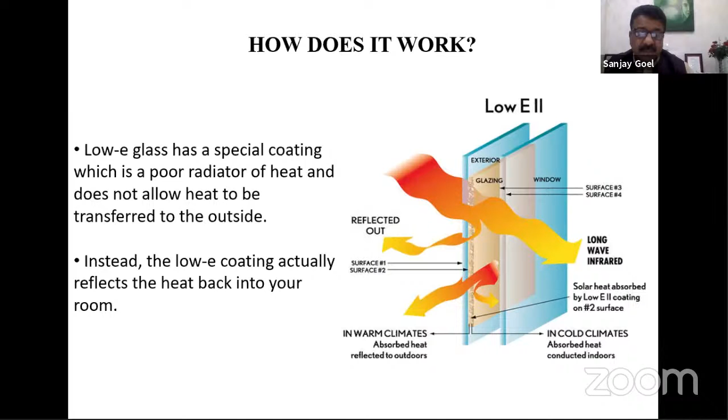Now, types of low E glass. There are two types of low emission glasses: hard coat and soft coat. Hard coat low E glass is the more common variety, made by coating the glass during the production stages with a thin metallic oxide layer. It is durable and difficult to scratch. Soft coat low E glass allows more visible light in with little visible haze levels.

Application of low E glass. Low emission glass was majorly used in commercial applications. However, it is now moving into the residential market as well. Low emission glass is ideally suited for office buildings, factories, homes, and public venues. Low E glass further improves thermal efficiency by cutting glare and preventing damage to interior furnishing caused by ultraviolet rays.

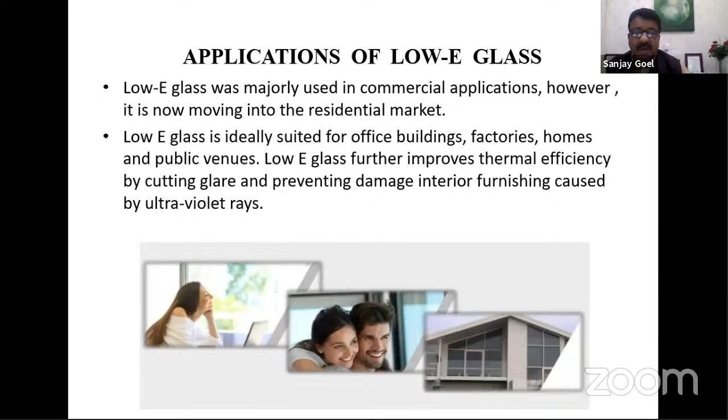Few more benefits of low emission glass. Energy efficient glass in windows can achieve energy efficient building envelope with greater design freedom, greatly reduced greenhouse gas emissions, reduced reliance on orientation, and improved security. It provides enhanced thermal comfort, up to 5 degrees centigrade warmer in winter and 10 degrees centigrade cooler in summer, improved acoustic performance, and reduced energy cost to heat and cool the building, a saving of approximately 40%.

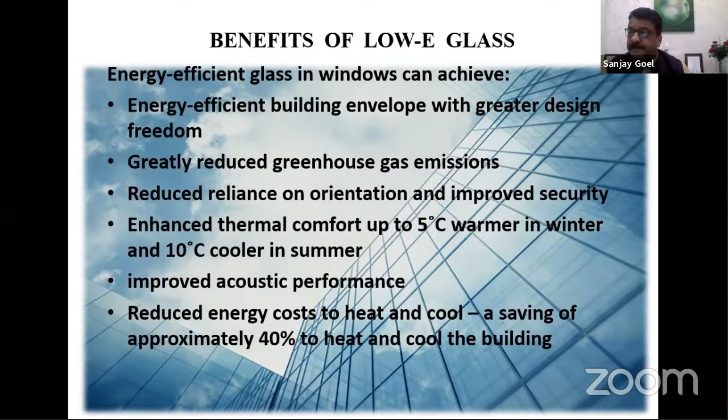Few more examples of creative personalities. I could not stop myself - I want to discuss the Rock Garden by great personality Nek Chand ji in Chandigarh. This is one of the best examples of best out of waste. Recently I got a chance to visit Gujarat and see a few upcoming smart cities there, where local administration with the help of architects are creating the best use of waste materials in their cities.

The same idea has been applied in a few cities of Punjab as well. A lot of waste is generated by industry and many more parameters, and I hope government at district level shall make the best use of waste in their cities. Nek Chand's Rock Garden is one of the best examples for designers.

You can see more art installations in India that use waste to promote recycling, such as the Waste to Art Museum in Bhubaneshwar. Sculptures prepared from waste are carved by national and international artists. Some notable sculptures include those of the Royal Bengal tigress, Flying Eagle, and the bust of Lord Buddha.

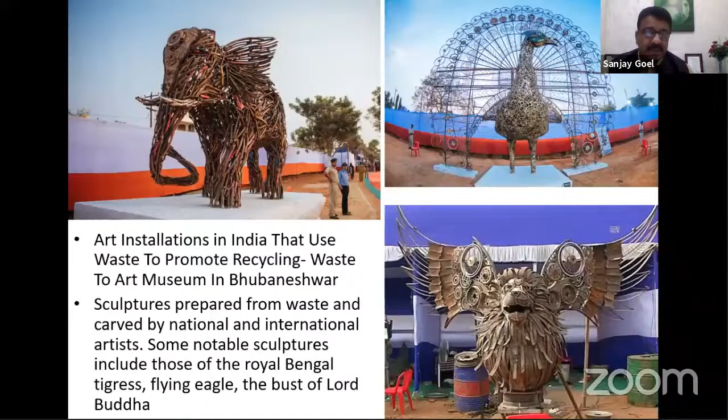We have also given an idea to the Ludhiana administration. Ludhiana, we all know, is called the Manchester of India, a city known for cycle production. We are trying our best to create a very big cycle out of waste at public parks, so that it acts as a selfie point in the upcoming smart city, and people can learn how hard local industrialists and architects are working by creating the best out of waste in cities.

After going through so many materials and things which architects, planners, and engineers must consider in their day-to-day life for making more sustainable green buildings, so that our buildings are comfortable not just for the architects or their clients but for everyone, the conclusion is that energy efficient materials play a vital role in energy conservation. Materials are there, we do take decisions, but we have to apply more thought to where a material is coming from and how useful it is in the short run and the long run. I hope planners and designers will be more careful in choosing materials for their constructions and interiors.

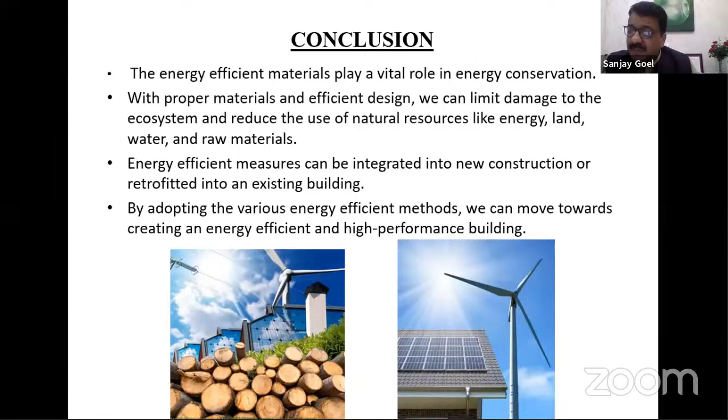These are my words on how the role of an architect is important, not only in creating modern and attractive or cosmetically sound buildings, but the real aim is to stay linked to nature. Let us plan and design things which are useful not only in the short run but also in the long run for whoever is using the building, whether personal or public. Let us come forward and work together to create a more livable India. Thank you, everyone. Thank you, my dear friends.

Thank you so much, sir, for emphasizing the usage of materials like bamboo, glass, AAC blocks, solar panel integration, grass pavers, and compressed mud bricks that can actually help make buildings more sustainable, and for showing that with proper knowledge of materials and their properties, we can start saving energy and the environment from the very initial step of building construction.

Now moving on to our question and answer session, there has been a question raised to Engineer Neeraj Singh: What is the free FAR incentive that you talked about in your presentation? Thank you so much, first of all this question is very interesting.

If you are an architect or engineer, you must know that FAR means floor area ratio. This floor area ratio differs in different cities and states. For example, if your floor area ratio is 2.5, it means you can construct 2.5 times your site area as built-up area. That is the meaning of floor area ratio.